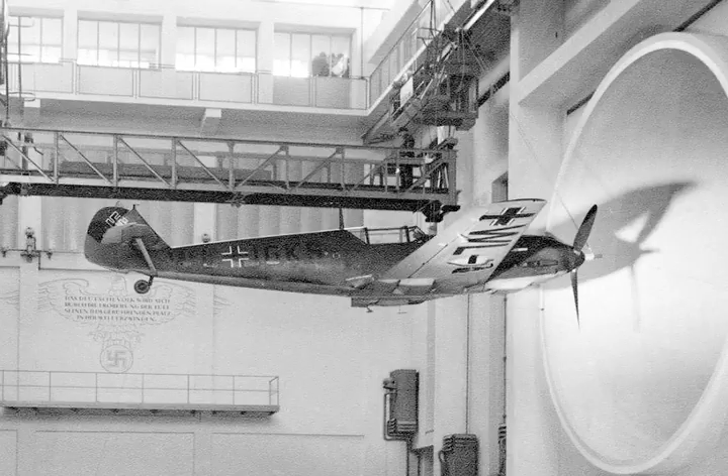On November 28, 1938, legendary aviator Charles Lindbergh sat down to write a letter to his colleague Joseph Ames. Lindbergh had been visiting Germany regularly for several years during a period of aeronautical achievements such as the Hindenburg airship, the first supersonic wind tunnel, and the construction of the first turbojet engine. He had become increasingly concerned that German military aircraft were flying higher and faster than their U.S. military counterparts. One reason was the coordination of their national research efforts.

Lindbergh wrote, "It is more necessary than ever before to give full scope to research if we are to regain the leadership we have lost in some of the fields of military aviation." Written just weeks after the terrifying Kristallnacht attacks in Germany shook the U.S. from its complacency, Lindbergh's letters became a key factor in the decision to create a state-of-the-art aircraft engine research laboratory in Cleveland, Ohio.

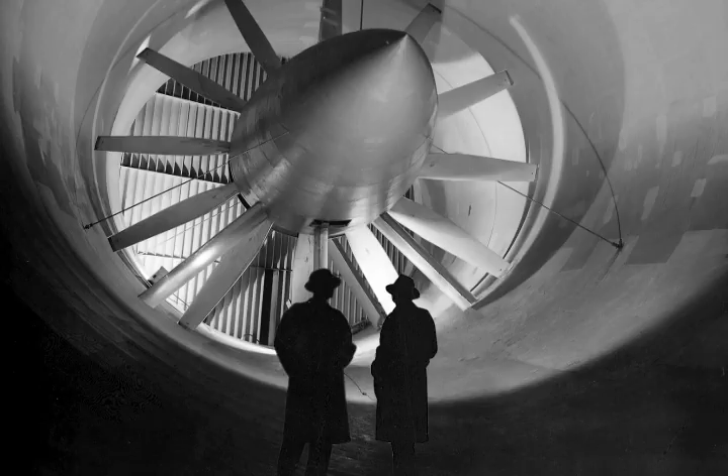The National Advisory Committee for Aeronautics, or NACA, was founded by Congress in 1915 to help the U.S. compete with Europe in the area of aeronautical technology during World War I. The NACA was a precursor of the National Aeronautics and Space Administration, or NASA, of today. As the threat of World War II loomed, the NACA expanded its research and opened 2 new laboratories. The one dedicated to the study of engines was located in Cleveland, Ohio.

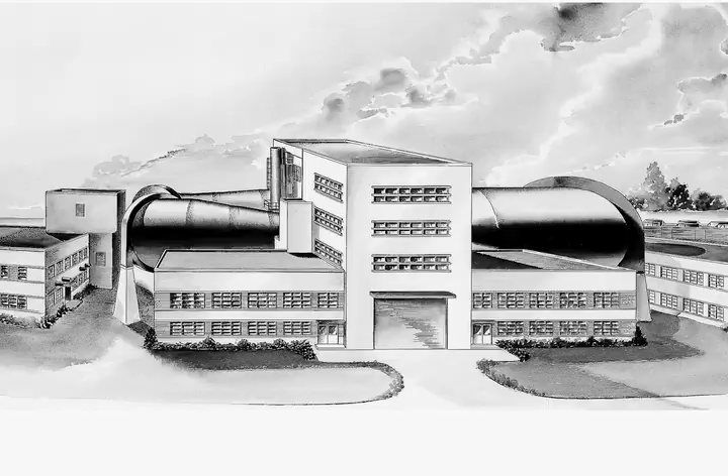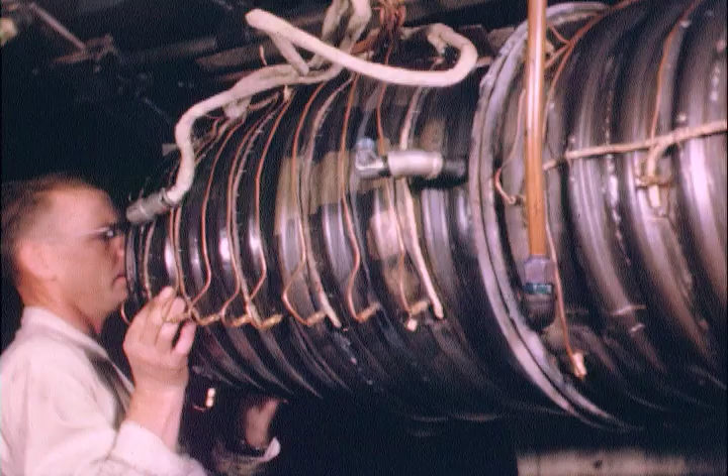This Aircraft Engine Research Laboratory, or AERL, included the nation's first wind tunnel for studying actual aircraft engines in the same conditions they would experience during flight. The Altitude Wind Tunnel, or AWT, allowed researchers to systematically study aircraft engine behavior and perfect new innovations in aeronautics. Designed by some of the best and brightest minds of the day, the AWT proved itself to be a crucial and versatile testing facility, from supporting the development of the jet engine during the 1940s and 50s to its rebirth in the 1960s for Project Mercury and Centaur rocket testing.

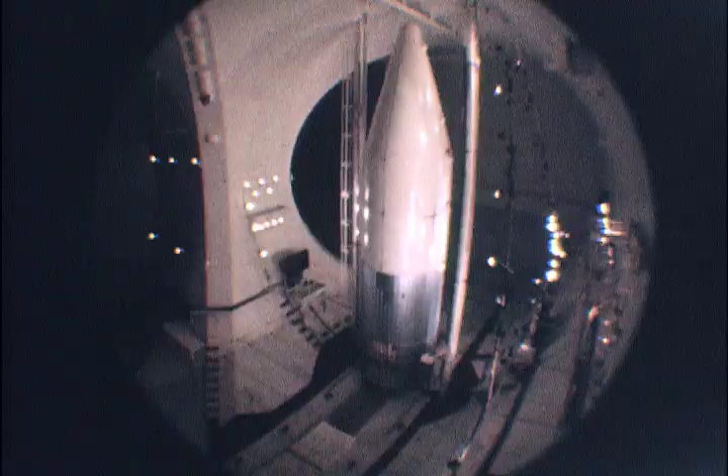The AWT was a huge project. This was, as you can see, a massive, massive structure. And there was no technology that would tell you how to build something like this. It was all new. The Altitude Wind Tunnel was likely the most advanced wind tunnel of its time. Designed by engineers at NACA's Langley and Ames laboratories, the AWT included a number of ingenious features needed to test full-scale aircraft engines in the airspeed, altitude, and air quality experienced during flight. This facility had to get temperatures that were very, very cold, and the air had to be almost a vacuum. And this was very difficult to do in a structure this size. And the amazing thing is it all worked perfectly.

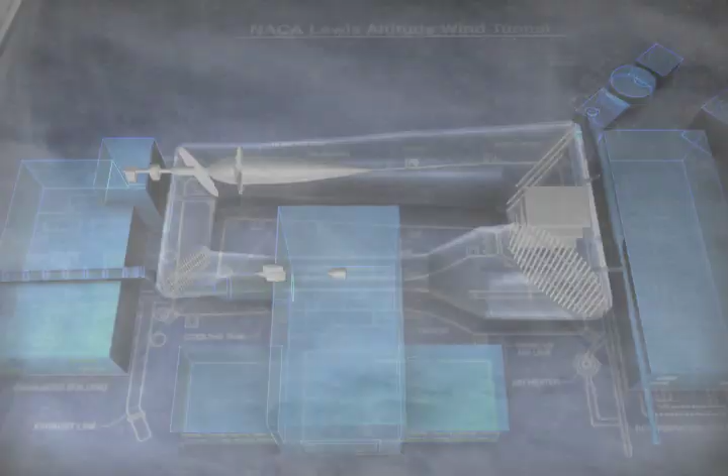The wind stream of the AWT was created by a massive 31-foot propeller, resulting in air speeds that could reach 500 miles per hour. As the wind stream raced down the tunnel, turning vanes directed it around the corners and straightened the flow. A powerful refrigeration system reduced the temperature to minus 47 degrees. Large exhausters in the exhauster building removed air from inside the tunnel to simulate the thin atmosphere found at high altitudes. Just prior to reaching the test section, the diameter of the tunnel decreased in order to further increase the speed of the Arctic wind stream as it rushed into the 20-foot diameter test section.

The roaring engine in the test section was operated remotely from the soundproof control room, as myriad instrumentation recorded tunnel conditions and engine performance. Engine contaminants were exhausted from the tunnel through a large air scoop located just beyond the test section. Fresh air was introduced into the wind stream prior to the test section to make up for this exhausted air.

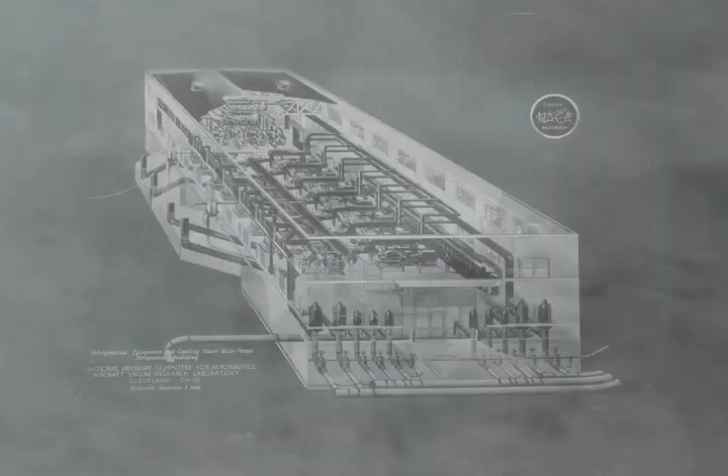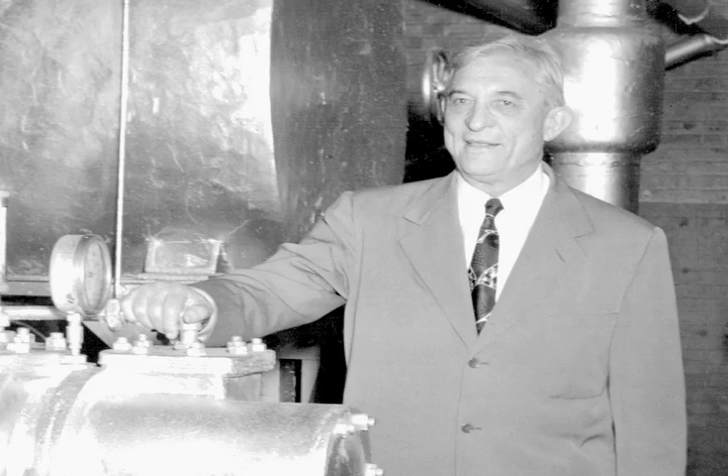One of the most daunting engineering tasks in the design of the AWT was the creation of a system to reduce the air temperature to frigid temperatures encountered in altitude conditions. This powerful system had to cool millions of cubic feet of airflow every minute, an unprecedented requirement that caught the attention of the one man considered to be a world expert on the cooling of air, Willis Carrier. Willis Carrier had pioneered the field of air conditioning and felt his company's heat transfer experts should be designing the AWT system. He informed the NACA that the Langley boys conducting the tests did not know what it was all about, and that too much money, and of more importance, too much time had been wasted already.

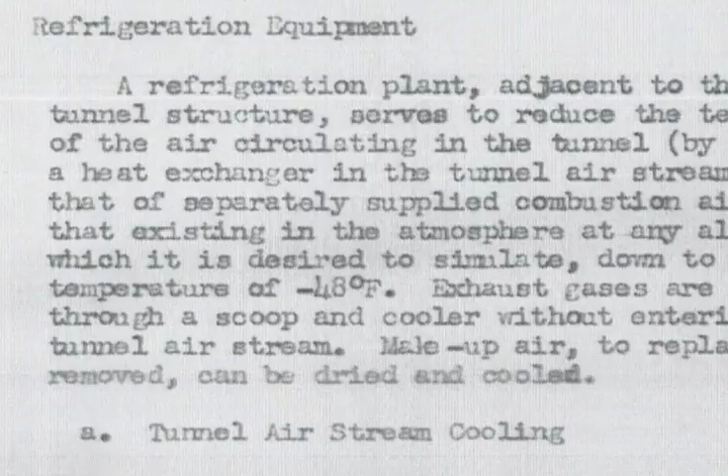Carrier and his engineers went on to devise the AWT cooling system, the largest of its kind in the world. In fact, it was claimed that if the massive cooling system were used for other purposes, it could generate 10,000 tons of ice per day. Willis Carrier would one day refer to the AWT as his greatest achievement.

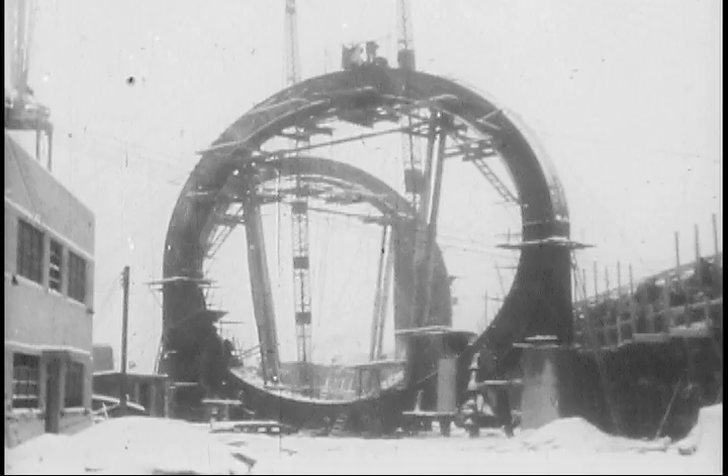Construction of the AWT had begun as the U.S. entered World War II. There was considerable pressure to complete the construction quickly in order to aid the war effort. The new B-29 Superfortress in particular was suffering problems with its engines as it attempted to reach a 30,000-foot cruising altitude. The AWT had been designed to resolve just such an issue.

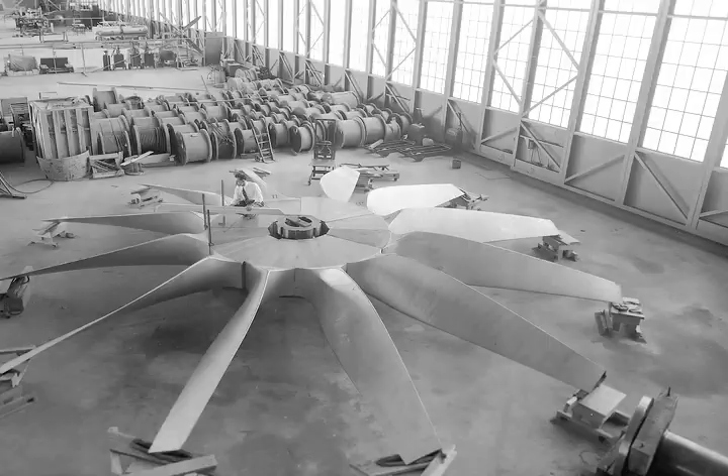On May 17th of 1943, the Memphis Belle became the first heavy bomber in World War II to successfully complete 25 bombing missions. Within 2 months, the Memphis Belle and her crew were back in the U.S. and visiting the AERL as part of a publicity tour. In the hangar behind the bomber, the large fan for the AWT was being assembled. By 1944, construction was completed and the AWT opened its doors for business.

Standing inside a wind tunnel, it is easy to lose one's sense of perspective. Inside, all lines converge toward a single amorphous vanishing point, a virtual light at the end of the tunnel. In order to gain some perspective on the true dimensions of the tunnel, it is helpful to bring a person into view. In much the same way, the research conducted at the AWT and the scope of its changing mission can be best put into perspective by bringing a different individual into frame, Dr. Abe Silverstein.

Dr. Abe Silverstein is best known as one of NASA's founding fathers and is credited with having named the Mercury and Apollo programs. He began his career in 1929 as an NACA researcher at Langley's massive full-scale wind tunnel. In 1943, he was transferred to Cleveland to manage the newly constructed altitude wind tunnel. He immediately set to work, assembling a 90-person team to run the tunnel. Many had been involved in its design and construction. Behind the scenes, Silverstein was involved in something far more secretive.

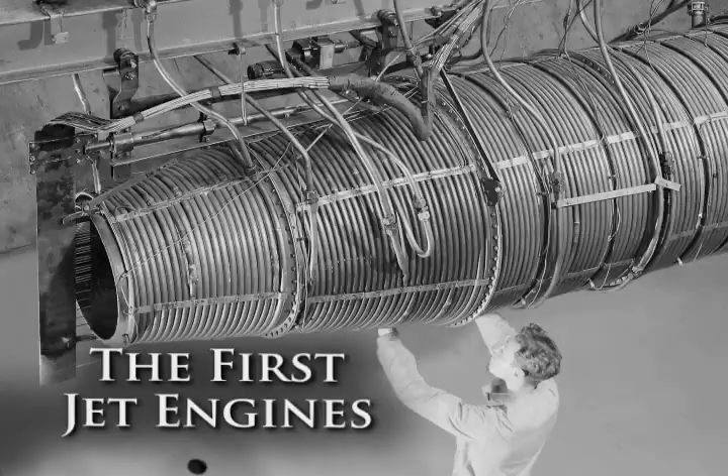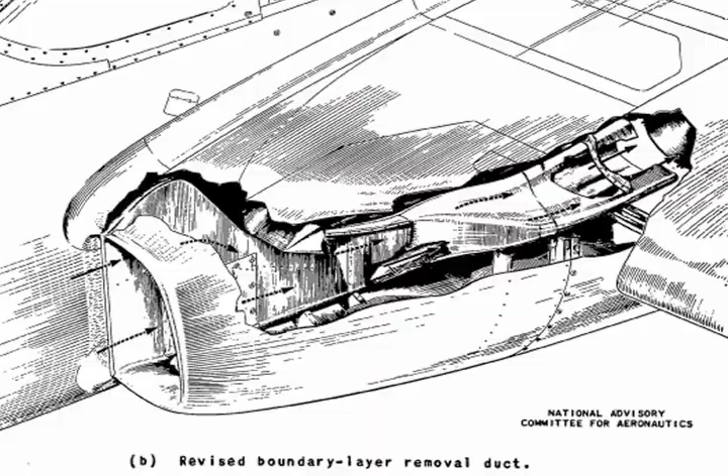The nation's first turbojet engine. The jet engine was developed independently in both Germany and Great Britain during the 1930s. American military leaders had witnessed the first British test flight of the engine in 1941. Plans for the engine were soon secretly transferred to the U.S., where General Electric, or GE, assembled it to create the IA engine, which was almost immediately upgraded and renamed the I-16. The I-16 was incorporated into a Bell YP-59A Airacomet airframe.

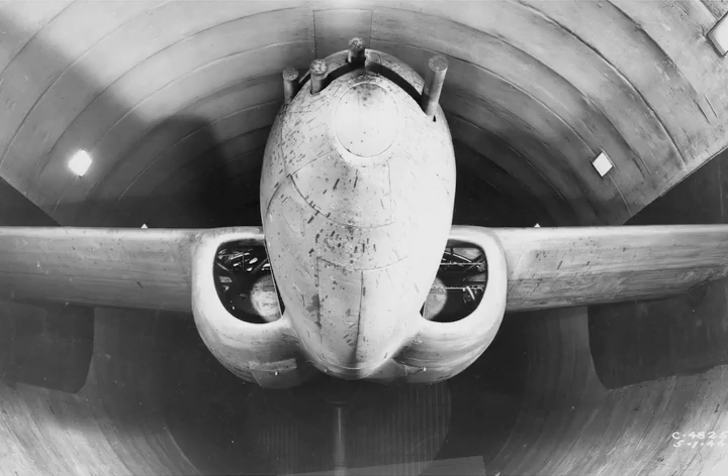In 1943, GE summoned Abe Silverstein to its West Lynn facility to discuss testing the I-16 in altitude conditions. When later asked why he was selected to participate in the secret project, Silverstein replied, "We had the only altitude tunnel. That's the reason I went." Soon afterward, one of the jets was flown to Cleveland for testing in the AWT. Modifications based on the AWT studies allowed better distribution of airflow and reduced drag, improving the aircraft's performance by 25%. However, the Airacomet would not play a role in World War II. The tests would portend an entire new role for the AWT, the development of the turbojet.

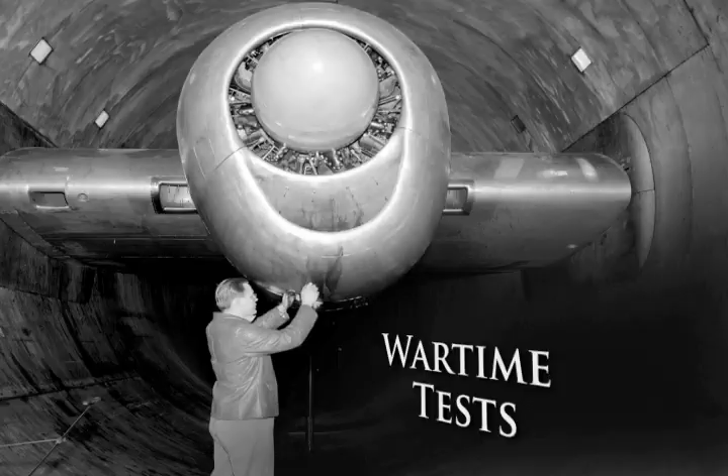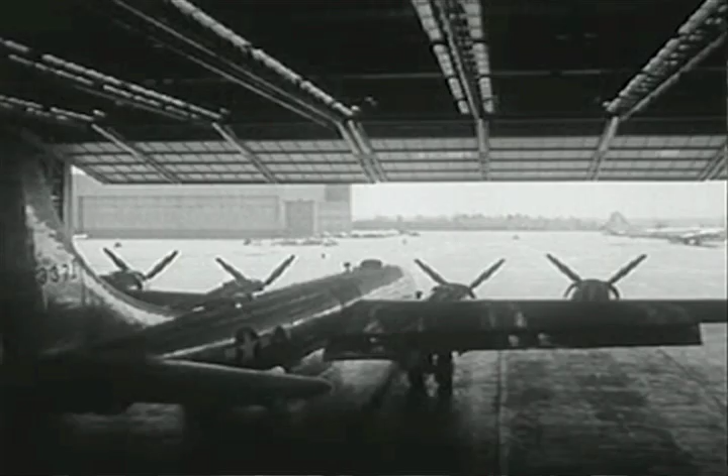In May 1944, an engine from the Boeing B-29 Superfortress was finally installed in the AWT. Researchers determined that its cooling problems stemmed from inconsistent fuel mixtures and poor airflow. By devising a fuel injection system and redirecting the airflow through the engine cylinders, they were able to improve the fuel efficiency by 18%, thus broadening the B-29's flight range and increasing its armament capabilities. The results were too late, however. The B-29's original strategy of high-altitude precision bombing of Japan had been changed to low-altitude firebombing, and the NACA's improvements were not implemented until after the war.

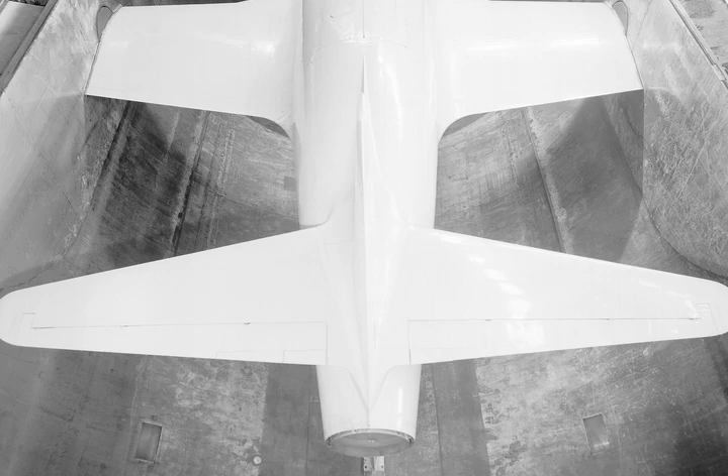The Lockheed YP-80A Shooting Star was the first jet aircraft to be completely manufactured in the U.S., and the first U.S. aircraft to ever fly faster than 500 miles per hour. Studies on the engine at the AWT resulted in the restarting of its GE I-40 engine above 20,000 feet for the first time, and an almost instantaneous 50% increase in thrust through use of a variable area nozzle. The Shooting Star would later go on to a successful reincarnation as the Lockheed F-80 during the Korean War.

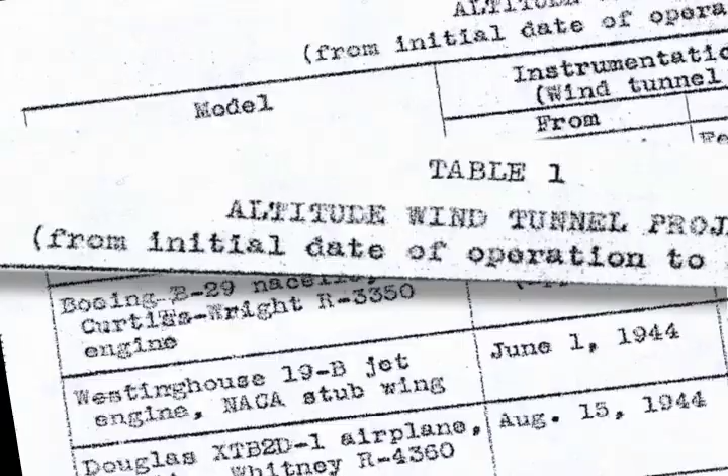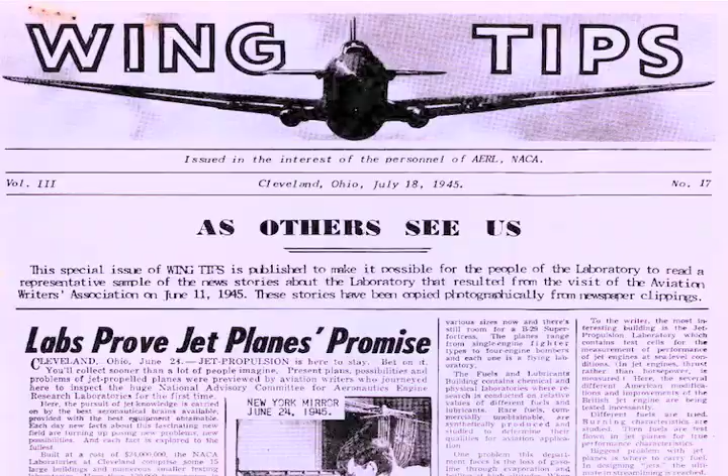In the end, the AWT had little effect on the outcome of the war. Its most applicable contribution, the baffling of the B-29 engines, was not implemented until later. Although U.S. development of the turbojet would not be fast enough to make any significant impact on the outcome of the war, it did have long-term effects. The AWT demonstrated remarkable flexibility and became a significant contributor in developing the nation's first jet engines, both centrifugal and axial flow. The AWT had not only survived the turbojet revolution, it had embraced it.

During its first 18 months of service, the tunnel was modified to test jet engines. The staff showed that it could handle the new facility. A methodology of analysis was established that would be applied repeatedly over the next decade, and the emerging AERL leadership showed that it could change course with almost no warning.

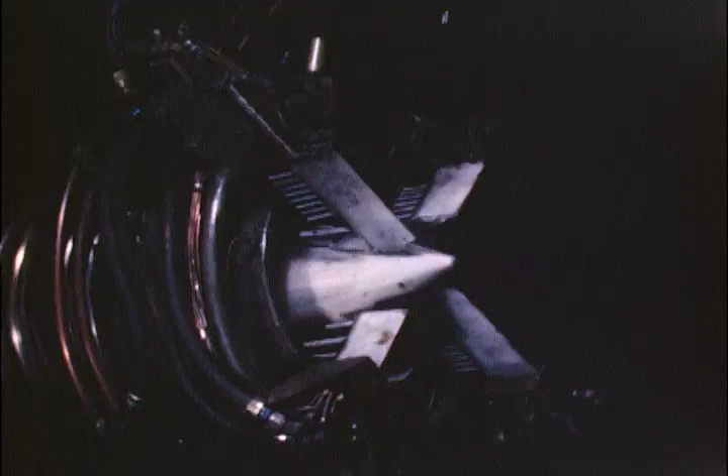The end of World War II brought about a reorganization of the entire laboratory. Turbojet research and the new realm of high-speed flight became the top priorities. Abe Silverstein was promoted to Chief of the Wind Tunnels and Flight Division, and in 1949 became Director of Research for the entire laboratory. One of the most significant problems with the early turbojets was combustion at high altitudes.

The AWT was the nation's only facility in which the combustion and performance characteristics of a turbojet could be studied under altitude conditions. Nearly every U.S. jet engine model in the 1940s was tested in the AWT. The engine companies would send their engines here, and they would be just put through their paces. And a great deal of marvelous data was then able to be released to the engine companies.

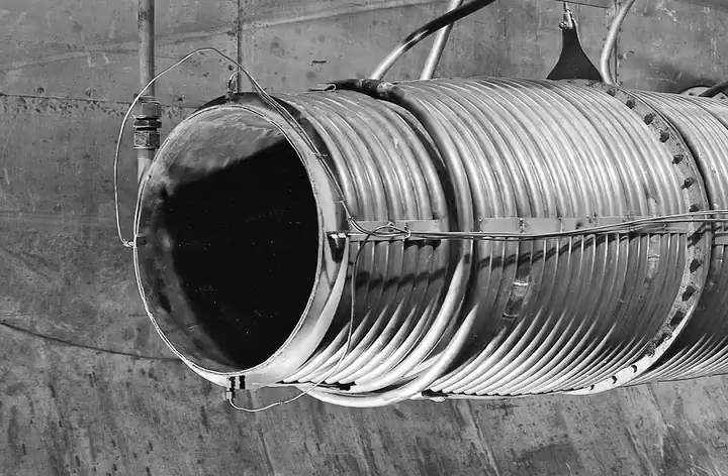Components such as the variable area nozzle and afterburner were run successfully for the first time in the AWT. The afterburner was actually developed at NASA Lewis, and there's a story about Abe Silverstein, who was Director of Research, who peeked in the window and saw the plume of fire coming out of that afterburner, and he was thrilled because it was the first time that it had been tested.

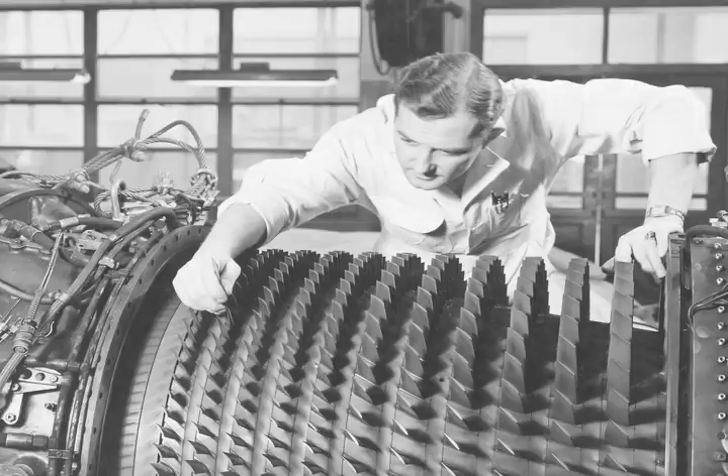As the 1940s drew to a close, the AWT completed its first sprint. The tunnel had been in almost constant operation for 6 years. It had played an important role in the steady development of the jet engine and was used to study ramjets and turboprops. The study and improvement of the axial flow engine from 1945 to 1949 was the AWT's most enduring contribution to the aerospace field.

The axial flow compressor was really the great contribution that this center made to the development of jet engines. The United States was really a pioneer in the development of the axial compressor. Although they'd been used in Europe, they weren't perfected until Lewis Research Center got their hands on it. The improvements developed in the 1940s would manifest themselves with drastic increases in engine performance and thrust in the early 1950s.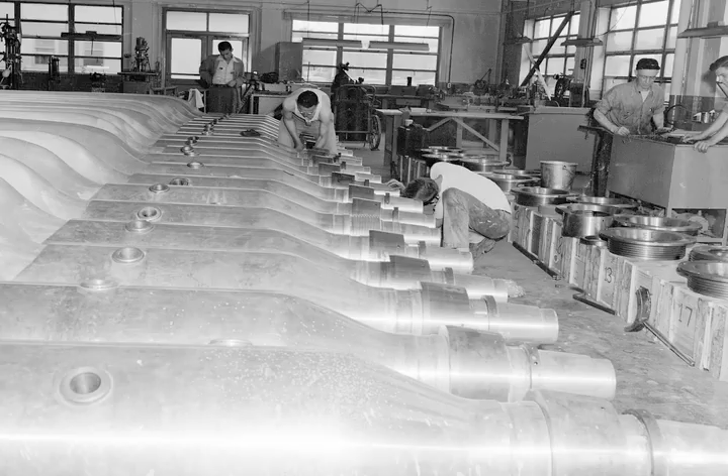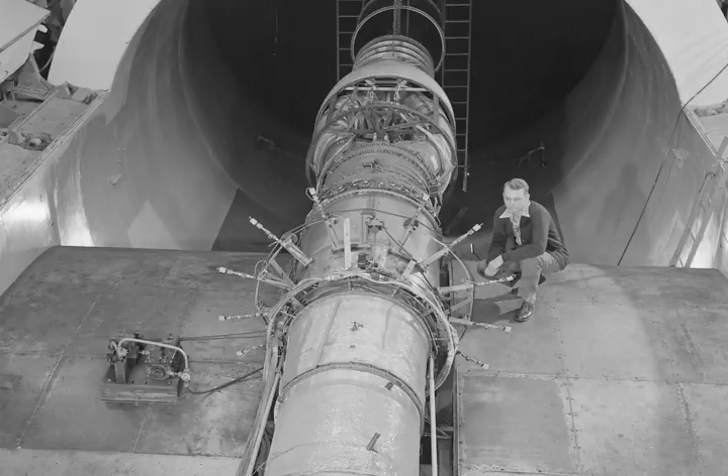In 1952, the AWT underwent an overhaul to increase its testing abilities. A new fan, exhausters, exhaust cooler, and water pump system were added. Afterwards, a series of larger engines were tested in the tunnel. Pratt & Whitney's J57 engine was probably the most successful jet engine of this period. The AWT conducted both general engine studies and a year-long noise suppression investigation on the J57.

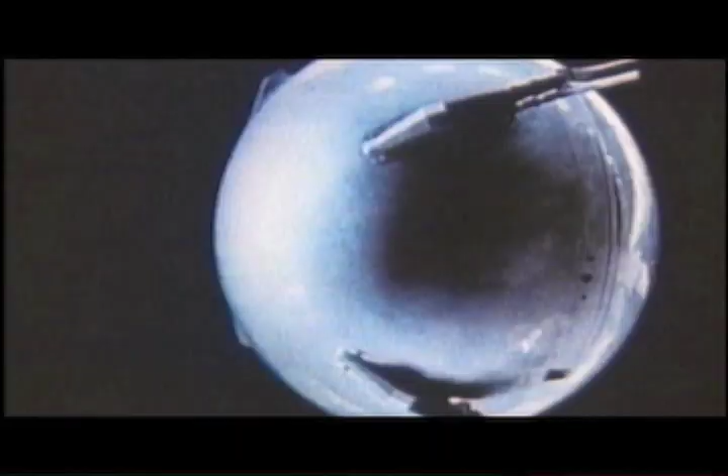By the late 1950s, however, use of the subsonic AWT began declining, and NACA aircraft engine research began plateauing. Some engineers were wondering, where do we go from here? The answer came on October 4th, 1957, with the launch of Sputnik and the laboratory's integration with the new NASA space agency 1 year later. Silverstein had been summoned to Washington, D.C. to help create and lead the new agency. The NACA Lewis Flight Propulsion Laboratory was renamed NASA Lewis Research Center.

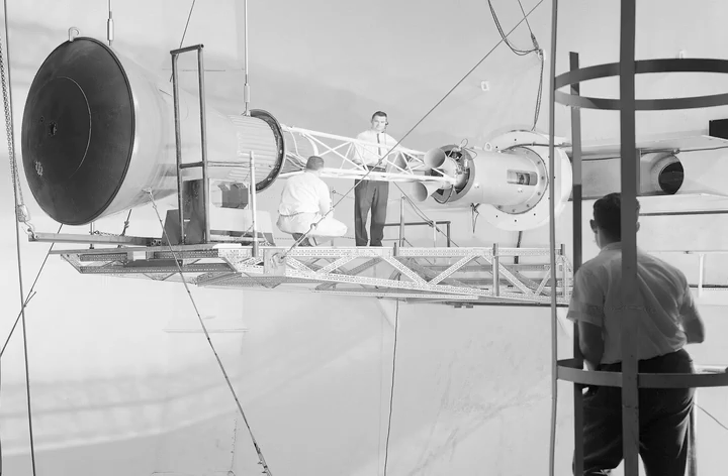The AWT would play a significant role in NASA's first effort, Project Mercury, only not as a wind tunnel. The agency began to recognize that at some point all these aeronautical capabilities had application for advancing the technologies that we need to do space travel and space exploration. AWT was one of the prime examples. The refrigeration coils and turning vanes were removed from the western leg of the tunnel so that the Big Joe attitude control and retro rocket system could be tested at simulated altitudes up to 80,000 feet.

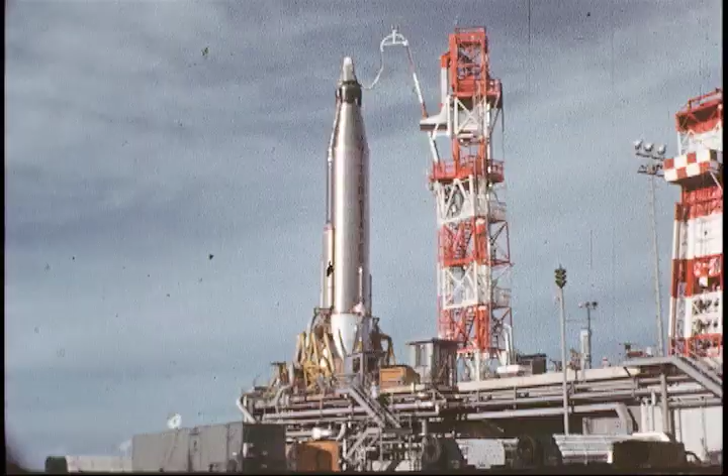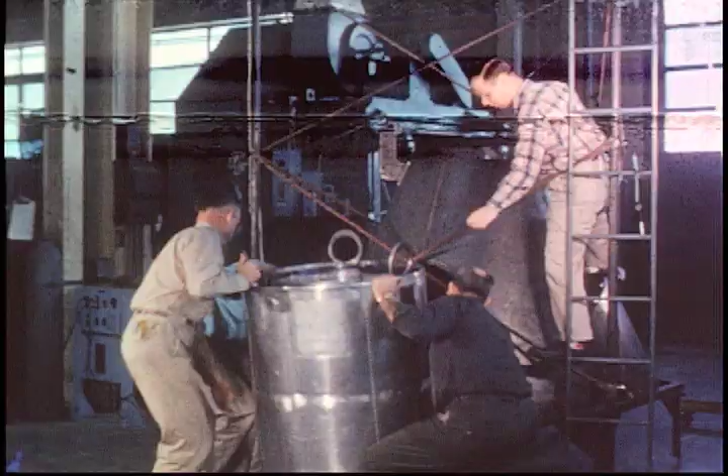Big Joe was a successful single attempt early in Project Mercury to use a full-scale Atlas booster and test the re-entry of a boilerplate Mercury capsule without actually placing it in orbit. Lewis designed the attitude control system and assembled the components. Its guidance system was tested in the AWT. Mercury capsule testing in the AWT continued afterwards with the separation system for the Atlas and Redstone boosters, retro rockets calibration, and escape tower rockets.

Perhaps the best-known AWT studies, however, were conducted in the gimbal rig. A gimbaling platform had been set up in the AWT for the Big Joe tests. Afterwards, a pilot's chair, control panel, and nitrogen jet control system were added to the rig. The Mercury astronauts would use this multi-axis space test inertia facility, or MASTIF, to practice bringing a tumbling spacecraft under control. A crude dressing room known as the Astro Penthouse was temporarily constructed in the AWT with a cot for astronauts to recuperate on after their rides.

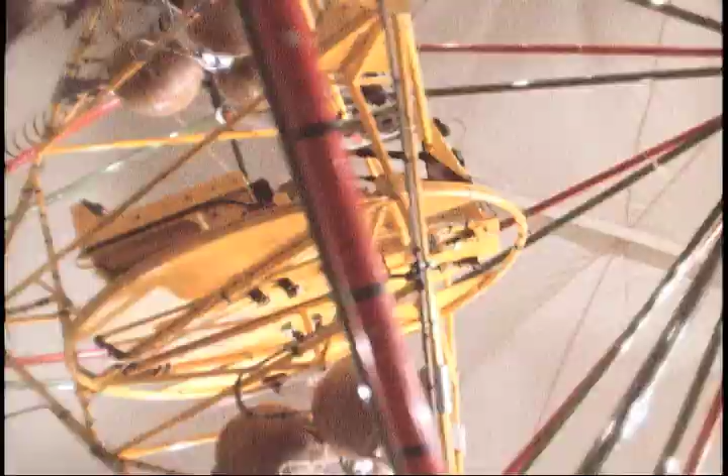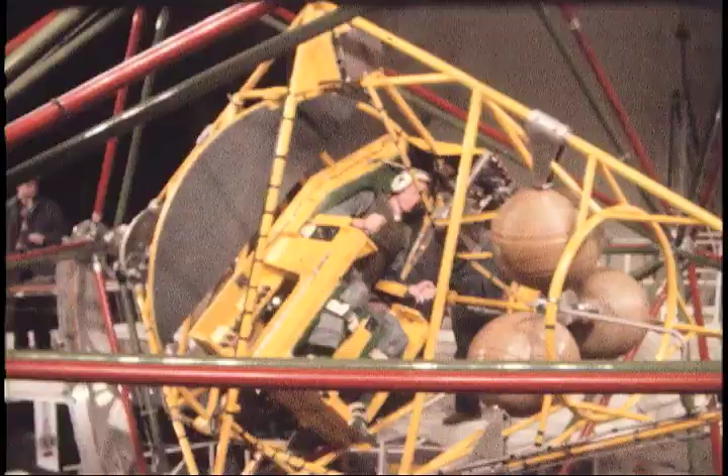In early 1960, the 7 astronauts, a female astronaut trainee, and several pilots traveled to Lewis to train on the MASTIF. Alan Shepard would be first. On the initial runs, Shepard did well, bringing the machine under control on 1 and 2 axes. Once all 3 axes were in motion, however, Shepard became ill and had to activate the chicken switch that signaled to the engineers to shut down the machine. Over the next few days, however, Shepard continued to climb into the rig until he developed a method to bring the machine to a standstill. John Glenn, Gus Grissom, and the others followed suit.

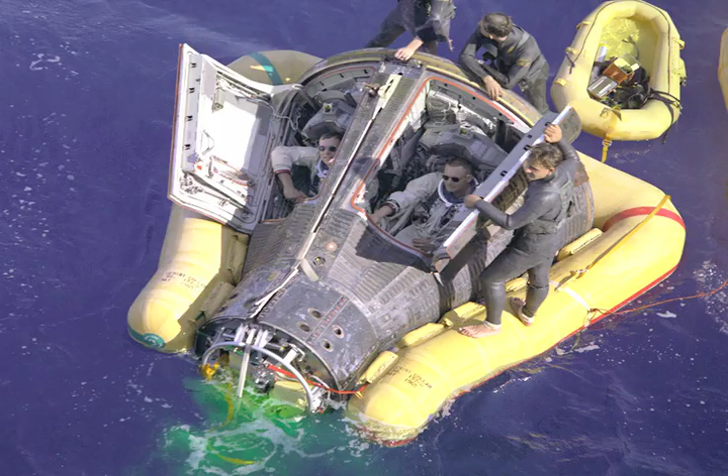When the AWT had come online just 15 years before, no one could have foreseen that it would be used as an altitude tank for manned space missions. But once again, it and its staff adapted quickly and contributed to a new role. Out of the test cells, these wonderful mechanics and technicians came and switched their attention from airplane problems to space problems, and we found that transition was almost seamless. The Big Joe capsule verified that the autopilot could keep the heat shield in position during re-entry. The Mercury escape system was never deployed during an actual launch. But the tumbling capsule scenario did manifest itself on Neil Armstrong and Dave Scott's Gemini 8 mission.

Following the decision to attempt to go to the moon, NASA began rapidly expanding its staff and test facilities. The space effort is extremely interesting, and it is an area in which there will be considerable growth for the future. I think the young men in this country who have been properly trained in the sciences and technology are, in many cases, eager to get into the program, and this will afford them the opportunity. Well, the beauty of government facilities is that they can be adapted to a variety of uses, and it's not really the facilities, but the people who are so creative, and they were able to find new uses for old structures.

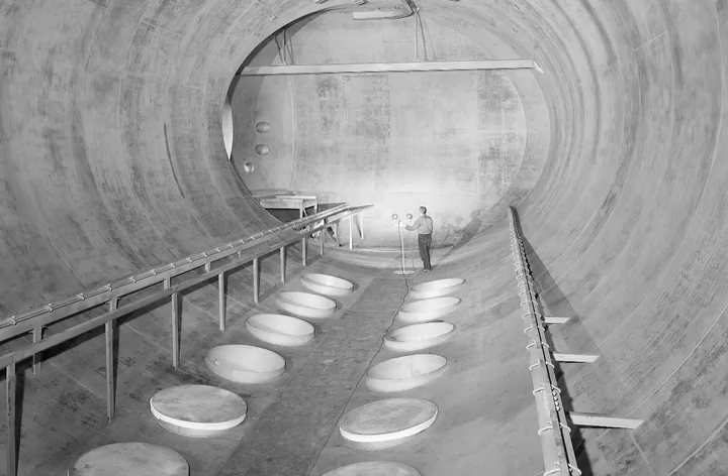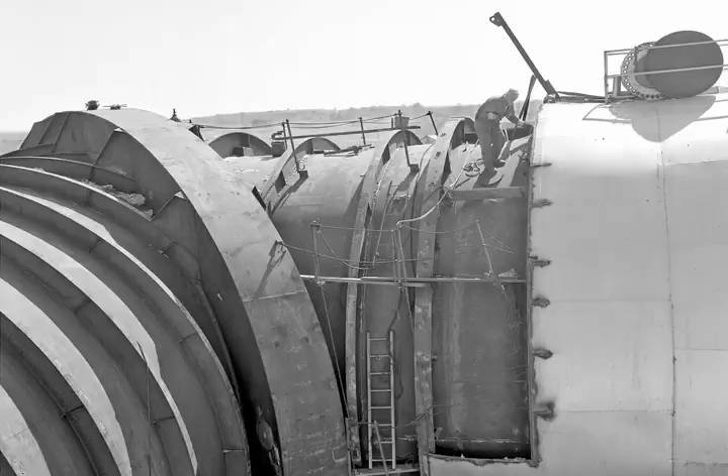One capability considered necessary by Lewis was a large space simulation chamber. Initial space flights revealed that the behavior of engines, operating systems, and flight hardware were affected by the environmental conditions encountered in space. It was decided to construct 2 test chambers within the AWT's tunnel shell, one capable of simulating the altitudes of outer space, the other of Earth's upper atmosphere. Bulkheads were placed within the tunnel to seal off the new chambers. The exterior shell of the east end was rewelded and a vacuum pump house was built underneath. After over a year of construction, the facility was officially renamed the Space Power Chambers, or SPC, on September 12, 1962. Its mission, however, would change dramatically just weeks later.

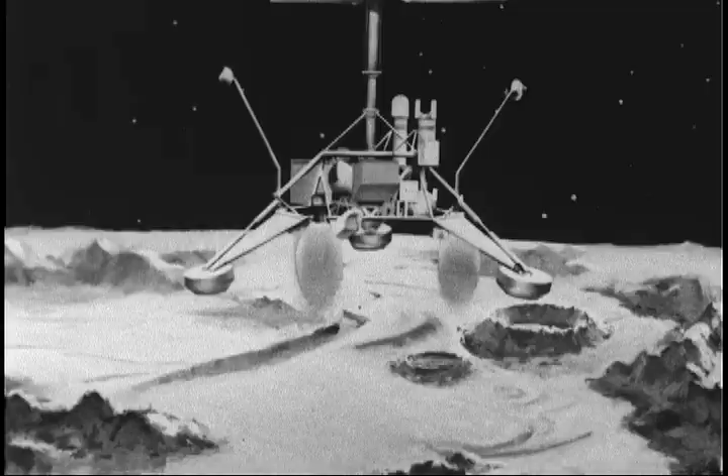Centaur was a powerful second-stage rocket designed by General Dynamics to run on liquid hydrogen and oxygen. It had a sophisticated design that allowed it to carry larger payloads and restart its engines in space. NASA was relying on the new rocket to send a series of the Surveyor spacecraft to the moon to photograph and sample the lunar surface as a precursor to the Apollo landings. We didn't know a lot about the moon, so programs like Lunar Orbiter were designed to find out things that were important to the design of the Apollo lander and, in fact, the entire Apollo system.

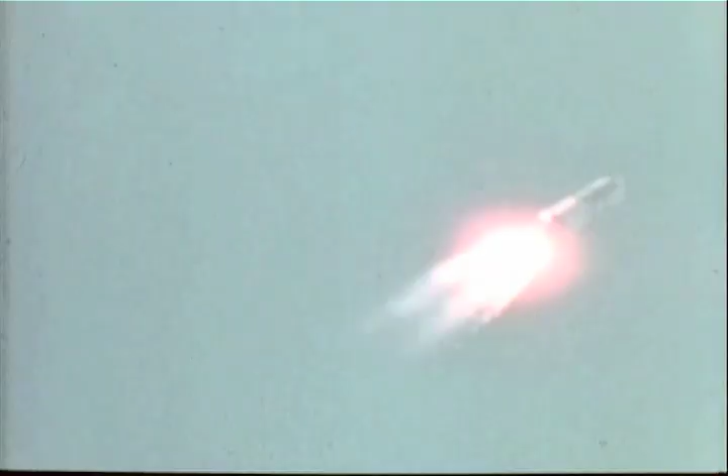After its initial launch exploded 54 seconds into the mission, the program was transferred to Lewis. Silverstein returned to Cleveland as Center Director in 1961 and personally oversaw the Centaur work. After a year of modifications and testing at Lewis's other facilities, the second Centaur launch was successful.

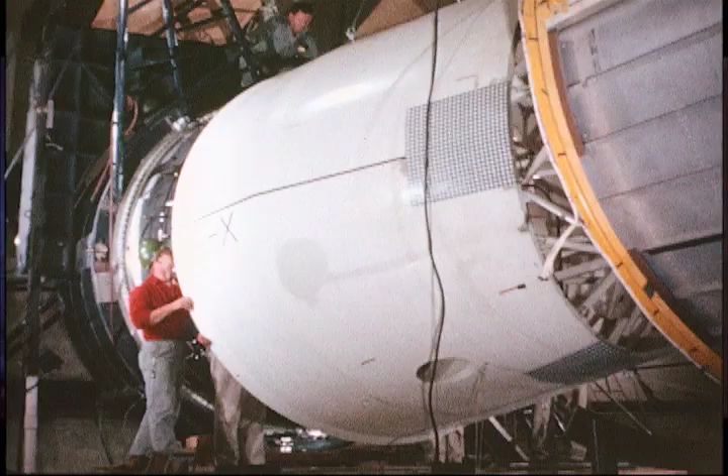It was a very exciting time. We were working on a high-priority program, had the highest national priority. It was a precursor to Apollo. Apollo was not going to happen without our perfecting the Centaur, so the Centaur could complete the Surveyor program.

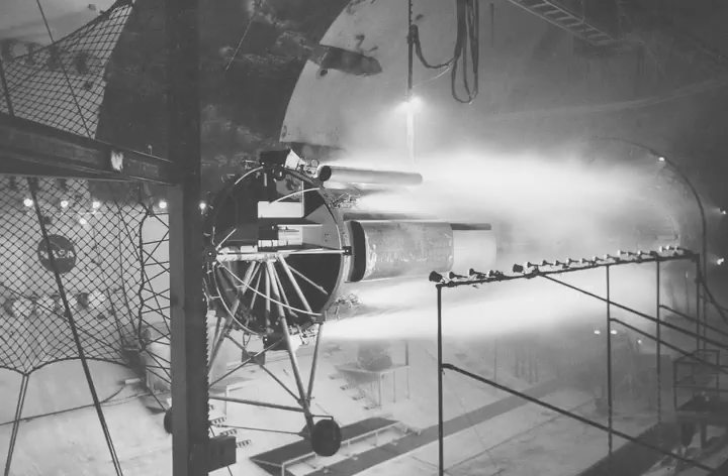The first study in SPC's high-altitude chamber analyzed the retro rockets, which separated the Centaur from the Atlas booster. A model that recreated the mass properties of a full-size Atlas Centaur was hung horizontally on a trolley system. These tests would result in a new jettison method that significantly reduced the separation time and thus minimized the danger of collision between the 2 stages during separation.

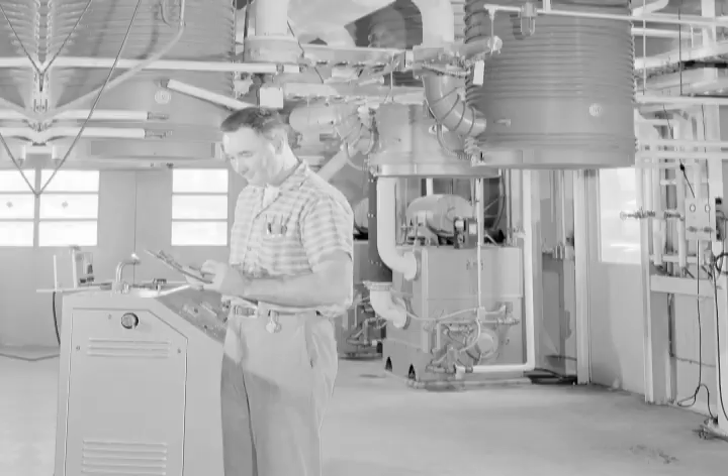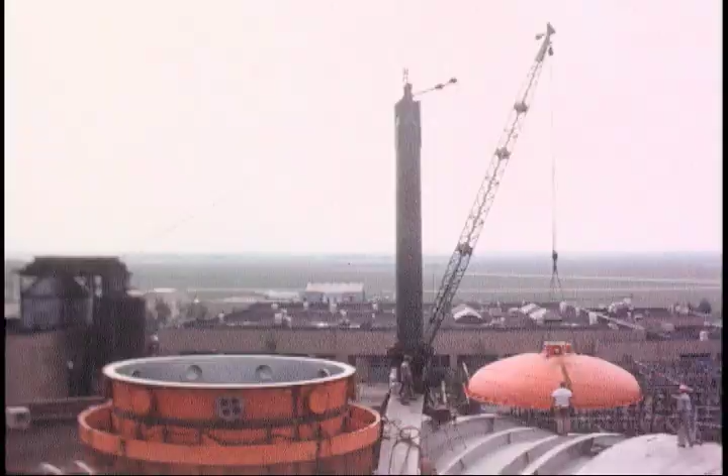A number of modifications were made to the SPC vacuum tank to accommodate a full-scale Centaur, the most prominent of which was the addition of a cylindrical extension with a detachable dome so that the rocket could be positioned vertically. A complex setup was installed inside the chamber to replicate other aspects of outer space.

A liquid nitrogen-filled cold wall enveloped the Centaur to simulate the cryogenic temperatures of space. Solar radiation was replicated using 6 banks of quartz lamps. Exhausters below the chamber created pressure levels found at an altitude of 100 miles. Electronic malfunctions were the most likely cause of failures in space.

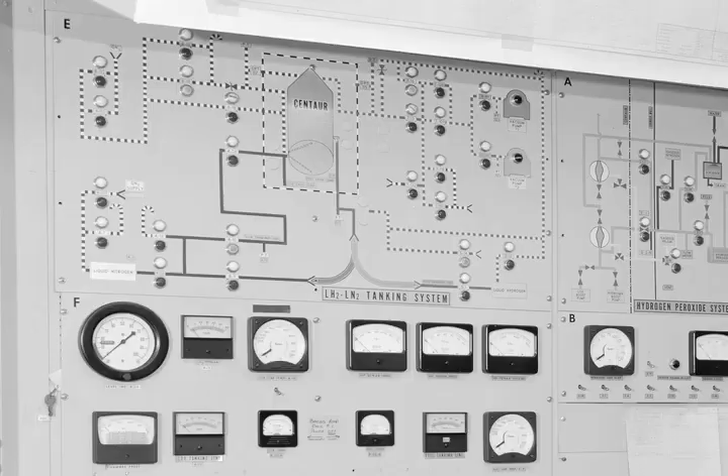Silverstein doctrine said that anything that can be tested meaningfully on the ground before flight will be. That is to say, conditions can be simulated accurately enough that you can do a meaningful test. We had to construct an entire control room that looked very much, if not almost identical, with the control room to be found at the launch complex at Cape Kennedy, had to be duplicated here. That's how you run the systems on the Centaur.

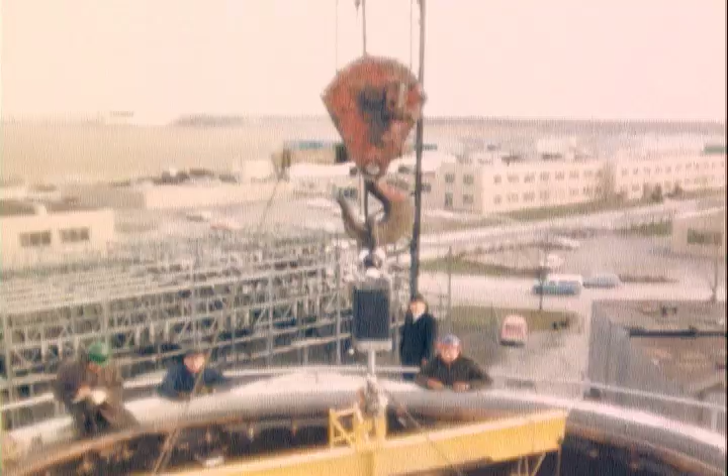In October 1963, a Centaur rocket was flown to Cleveland for the tests. And that Centaur was brought from the Cape here to Cleveland. I was here the day it arrived, I'll never forget it, and was set into the chamber in a vertical state on a stand. Long soaks inside SPC's vacuum tank would help the Lewis team determine the effects of the space environment on Centaur's electronics.

For several months, General Dynamics personnel worked with Lewis researchers as they studied and began reassembling the rocket in the shop area. Well, our engineers and mechanics and technicians who had never before been exposed to a machine like the Centaur had to become educated about what it is and how you handle it, especially this fragile, thin-walled structure that you had to be very careful handling because it could not sustain its own weight.

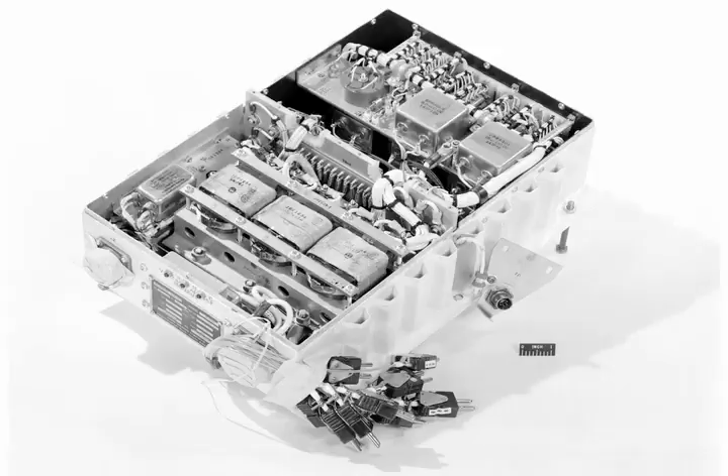The effect of heat, both on the electronics and emanating from the electronics, was one of the primary concerns going into the Centaur tests. The liquid hydrogen propellant had an extremely low boiling point, so any additional heat could cause problems. We had to have step-by-step procedures that were carefully controlled, changes were controlled. We were all on headsets, would sit at our consoles and operate our systems.

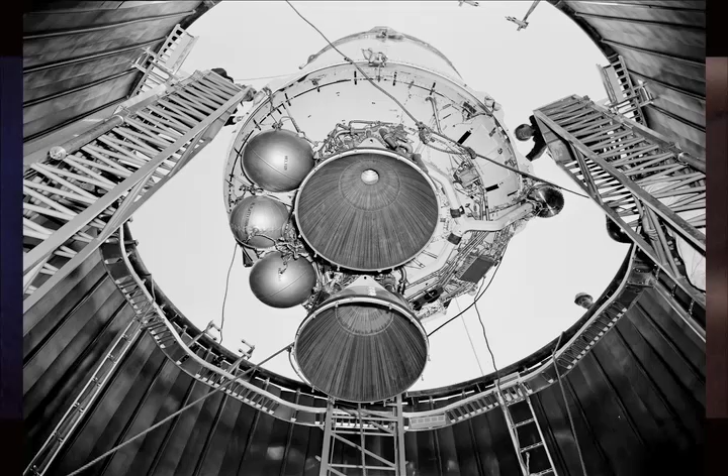I had the range safety control, C-band telemetry systems under my responsibility. And we ran through our procedures under the control of a test conductor, and it would take the better part of a day to get through a number of runs. The SPC tests, which replicated the entire mission except the firing of the engines, determined that the electronics did not transfer heat to the spacecraft or propellant tanks. So that testing was done here, and it was a major step forward in increasing the reliability of the Atlas Centaur.

The June 30th, 1964 launch of Atlas Centaur 3 was successful, but the rocket's guidance computer had been interrupted briefly during the ejection of the nose fairing. This mishap could result in a future launch failure. Nose fairings provided an aerodynamic shield for the payload, guidance system, and electronics package as the rocket travels through the Earth's atmosphere. Upon entering space, the two pieces are ejected away from the space vehicle.

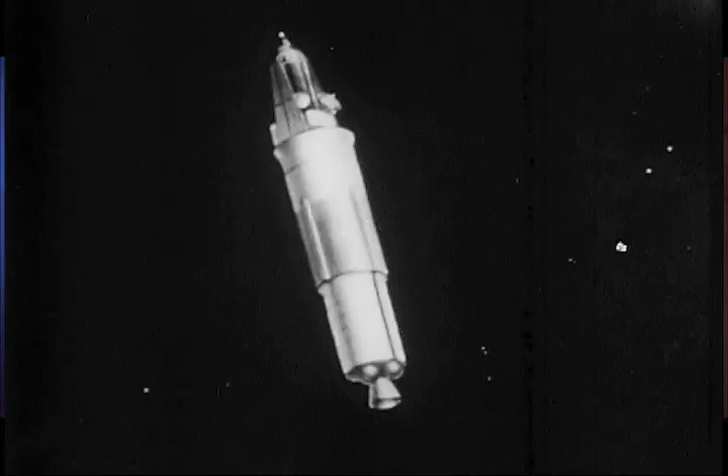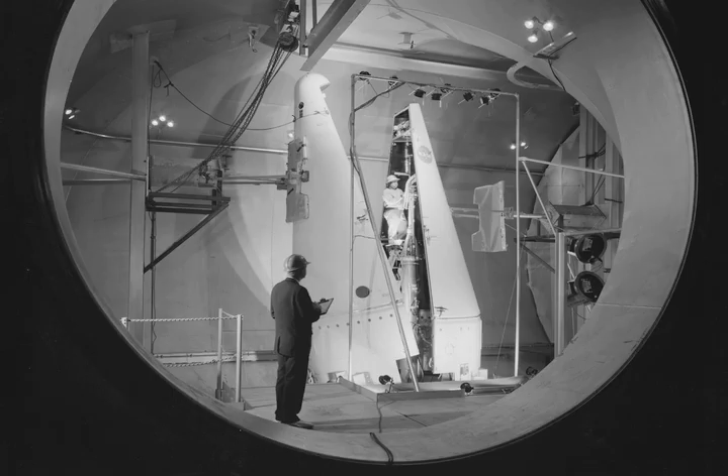The trick is to get those shrouds, after the appropriate period of time in flight, those shrouds separated and safely so that they don't damage the rocket, they don't damage the spacecraft, but they do come off. Within a month of the AC-3 incident, the jettison system was modified and shroud requalified in the SPC. The next launch was the first Centaur mission to have a completely error-free shroud jettison. The following launch attempt, Atlas Centaur 5, never escaped the pad, however.

An ensuing redesign required a retesting of the shroud in SPC. We did many tests of Centaur shrouds on both ends, beginning with the Surveyor, the first payload carried by Centaur, and later into larger shrouds that involved orbiting astronomical observatories. It was done on the other end of this chamber.

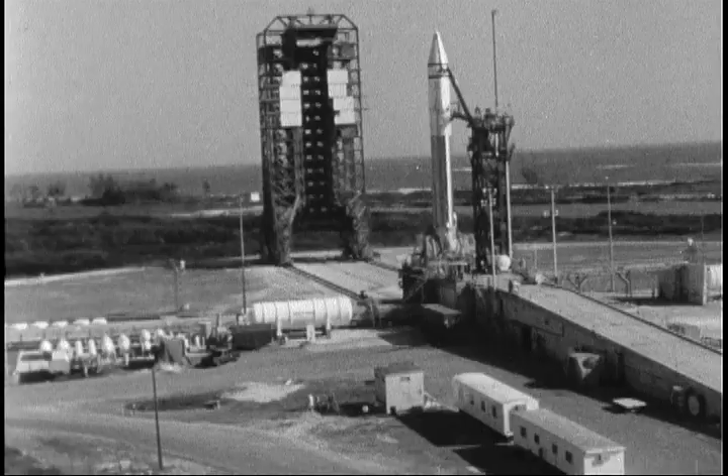Atlas Centaur 6 launched from Cape Canaveral on August 11, 1965, successfully placed a Surveyor model into an elliptical Earth orbit. The mission restored the nation's confidence in the Centaur's capabilities. Finally, on May 30, 1966, the Atlas Centaur 10 vehicle lifted off from Cape Canaveral carrying the Surveyor 1 spacecraft. The Centaur stage performed perfectly, and Surveyor was on its way.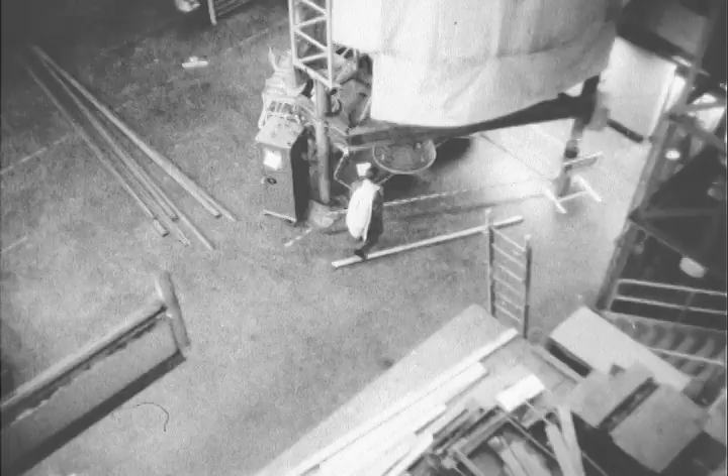3 days later, the Surveyor began sending back images from the surface of the moon. The problematic Centaur had been turned into a tremendous success, thanks in part to the testing at the SPC. 4 years of intense work at the center had paid off.

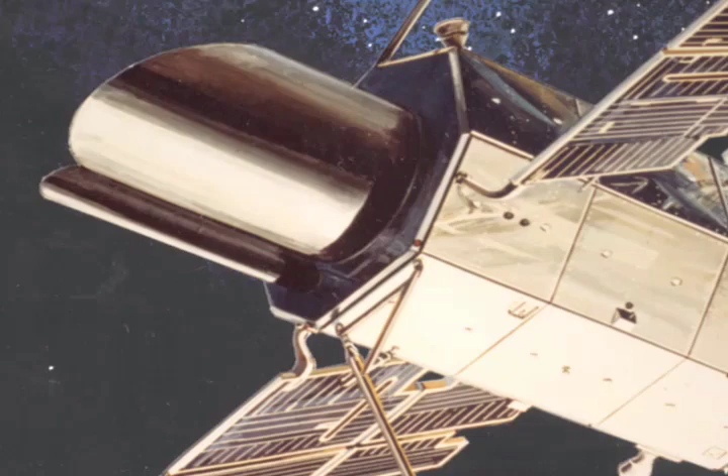A series of satellites carrying large telescopes in the late 1960s and early 1970s were designed to view distant stars and galaxies. The high-altitude SPC chamber was used to test the shroud separation systems for most of these missions. The second of these, launched in 1968, was the largest payload ever carried by a Centaur. After only a month, the satellite obtained over 20 times more ultraviolet data from stars than all of the sounding rocket studies of the previous 15 years combined.

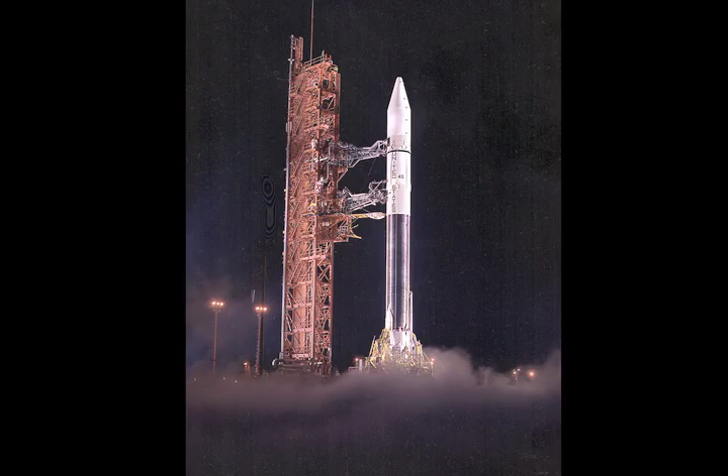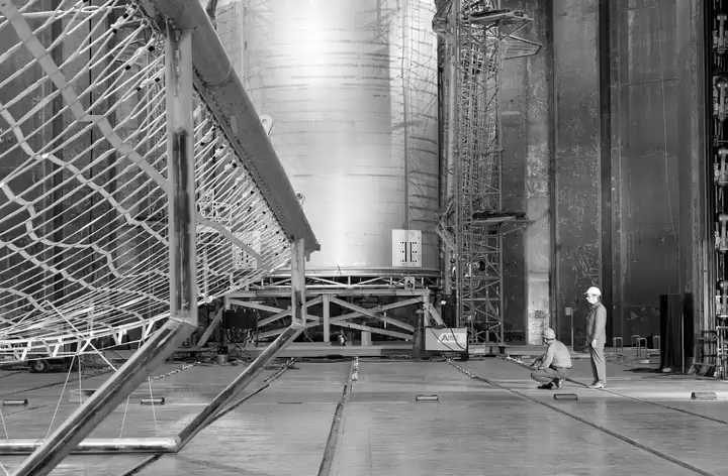The next mission, however, failed when one of the bolts securing the shroud did not release. The SPC was used for the failure investigation and testing of the new single-motion design. SPC continued these large shroud jettison tests for additional missions until 1975. The SPC had proven its value during the extensive Centaur testing of the 1960s. However, newer, more powerful facilities began to supersede its abilities.

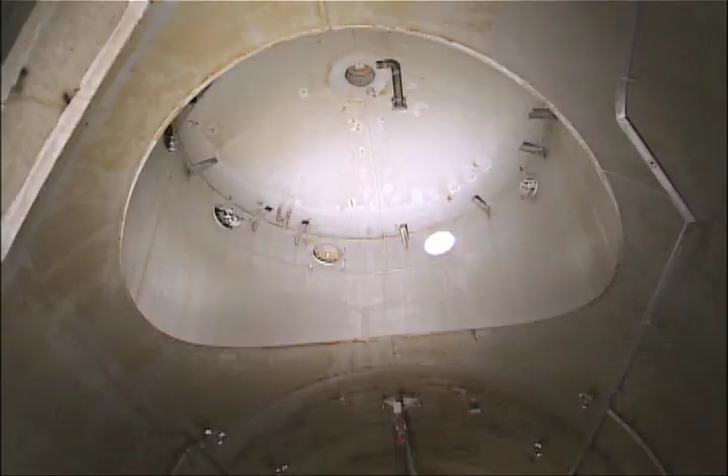By the mid-1970s, the space power chamber was shut down. Usable equipment was removed. Doors were shut. The electrical connections severed. And the light at the end of the tunnel went dark. Over the coming years, the shop area was repurposed for work on electric vehicles and eventually became a successful antenna testing facility.

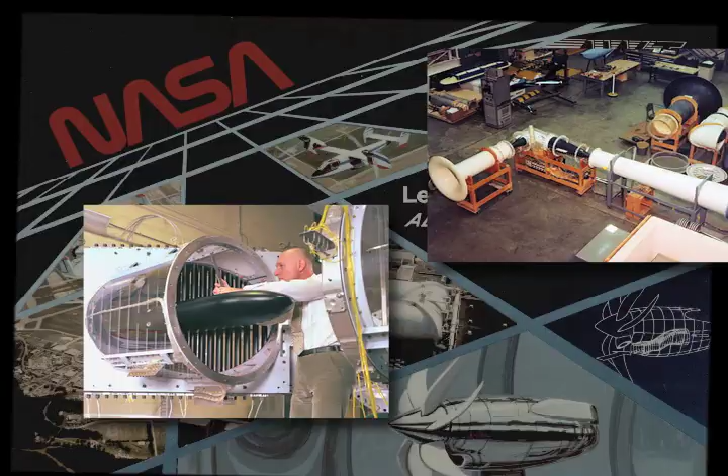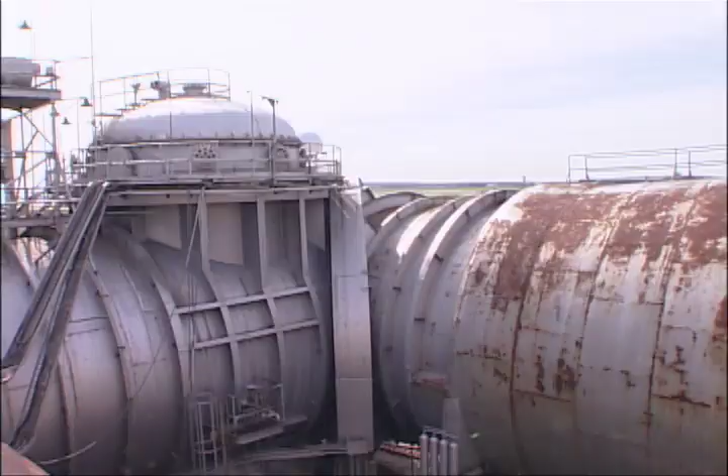In 1985, an extensive effort was made to study a proposal to restore the AWT wind tunnel for vertical and/or short takeoff and landing, or VSTOL, high-speed turboprop, and rotorcraft testing. When Congress canceled the proposed restoration, the tunnel slipped into a deep hibernation. Though the steel behemoth would continue to stand, the rust was slowly beginning to show.

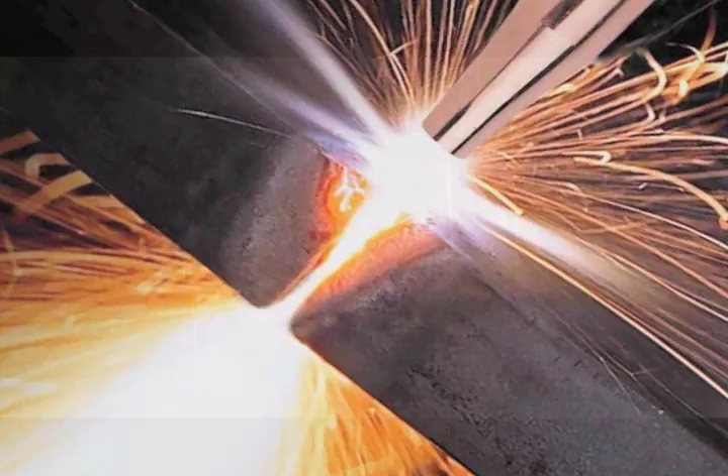The stories of the altitude wind tunnel and space power chambers were fading, along with the men and women who had once brought the facilities to thundering life. The once thriving facility would remain inky black and dead quiet for 25 years. In December of 2008, there was a clamoring on the outside tunnel wall. After a few minutes, molten steel began to drip to the tunnel floor.

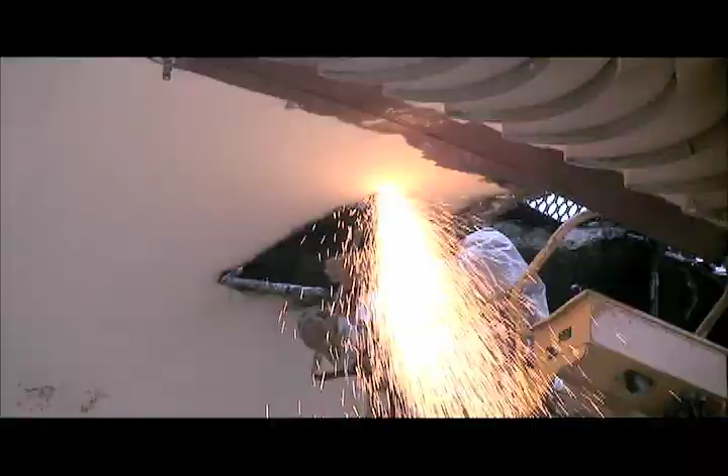The tunnel had been built to resist the forces of high-speed winds and a crushing vacuum environment. However, it was no match for the blazing hot knife of a cutting torch. The AWT and SPC were coming down. In 2004, NASA headquarters had offered its center's funds to demolish unused structures. The NASA Center in Cleveland, which had been renamed the Glenn Research Center, decided it was time to remove the AWT and SPC.

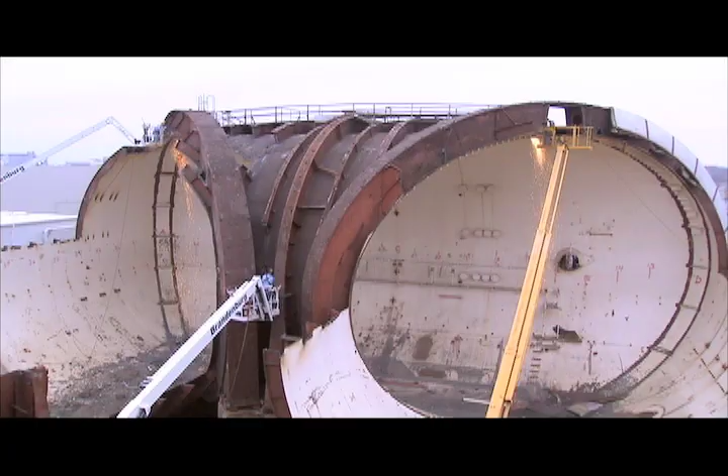NASA Glenn spent 3 years photographing, researching, and documenting the history of the AWT before its demolition. The AWT SPC facility was one of the most successful test facilities for both the NACA and NASA. And yet, the true strength of the AWT SPC facility cannot be measured in terms of steel and wind speed. For the building itself would be of minimal benefit, were it not for the excellence of its staff and far-sighted leadership, as exemplified by Dr. Abe Silverstein.

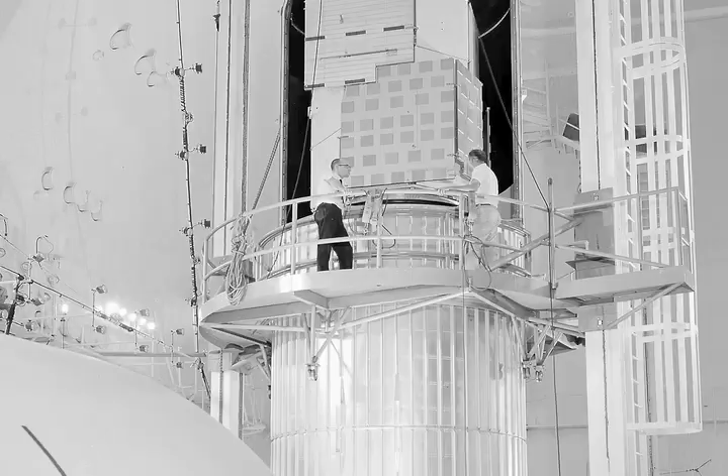The tunnel is now gone. The echoes of its highly skilled staff and the advancements they made live on.